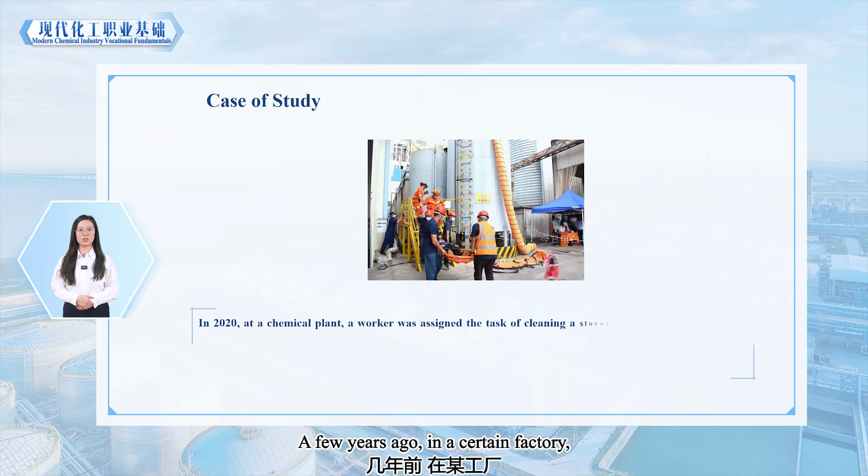Before we begin today's lecture, I would like to share with you a real accident case. A few years ago, in a certain factory, a worker was assigned the task of cleaning a storage tank. Unfortunately, shortly after entering the tank, the worker lost contact. Although rescue personnel arrived quickly and carried out emergency rescue efforts, regrettably, by the time the worker was rescued, vital signs had ceased. Why would a storage tank take a life? And how can such accidents be prevented?

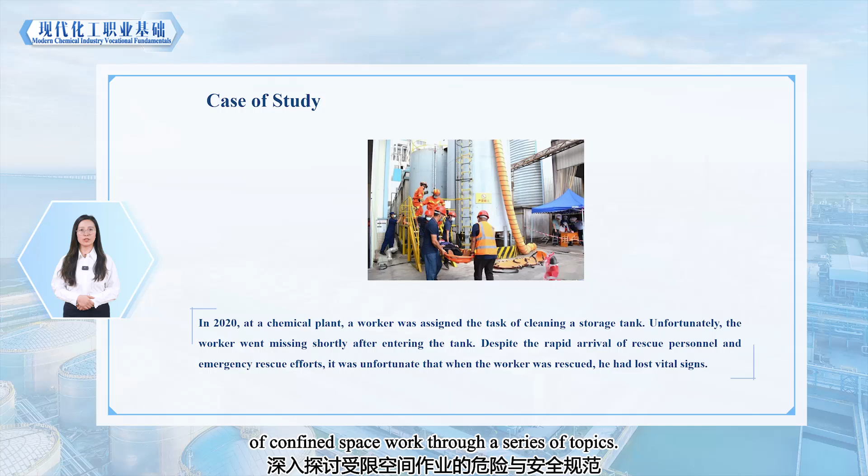Next, we will delve into the dangers and safety regulations of confined space work through a series of topics. First, let's understand the definition of a confined space.

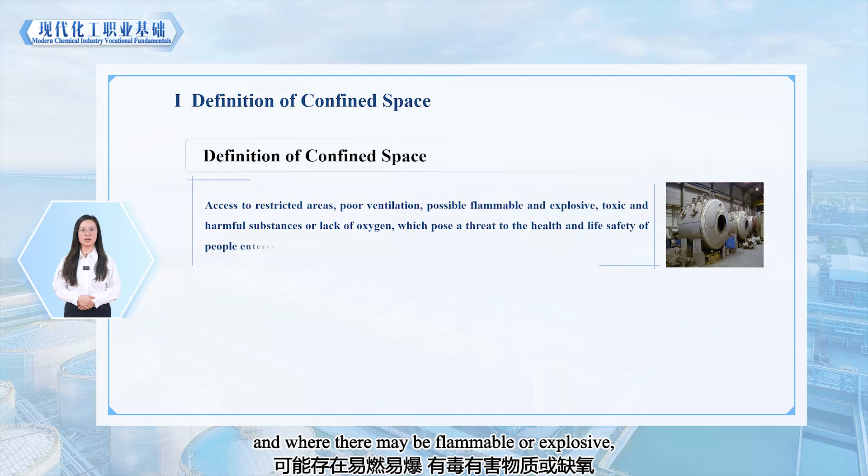A confined space refers to a facility or area that has restricted entry and poor ventilation, and where there may be flammable or explosive, toxic or hazardous substances, or oxygen deficiency, which poses a threat to the health and life safety of those entering, whether fully enclosed or semi-enclosed.

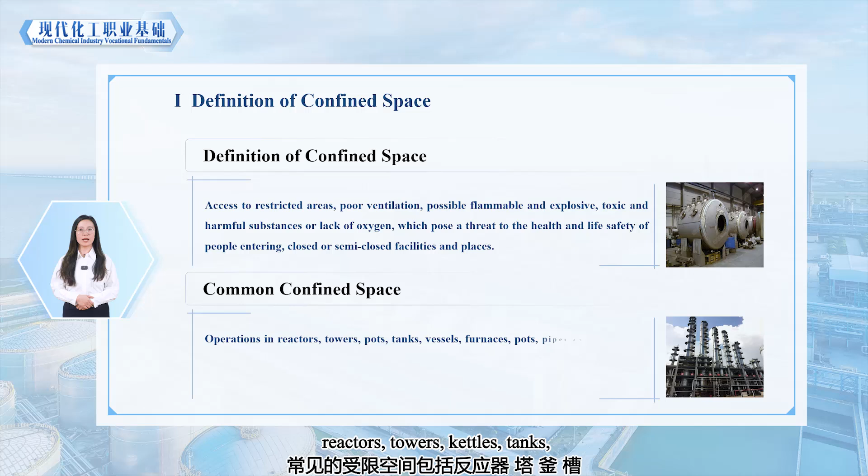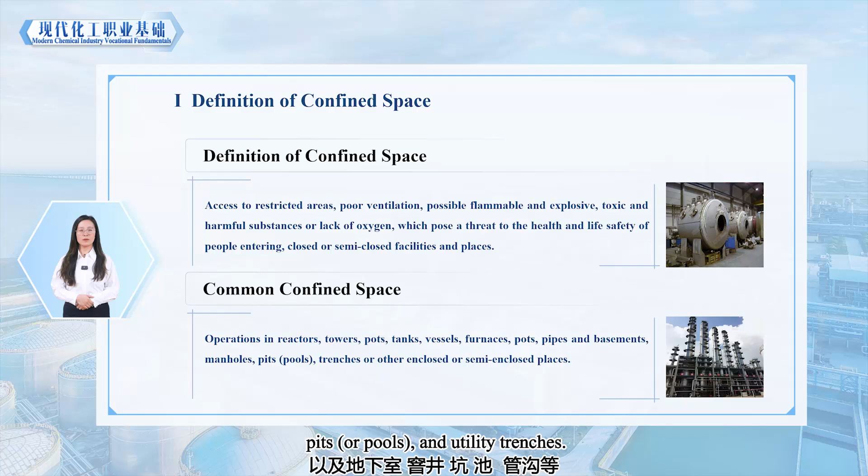Common confined spaces include reactors, towers, kettles, tanks, vessels, furnace chambers, boilers, drums, pipelines, as well as basements, manholes, pits or pools, and utility trenches.

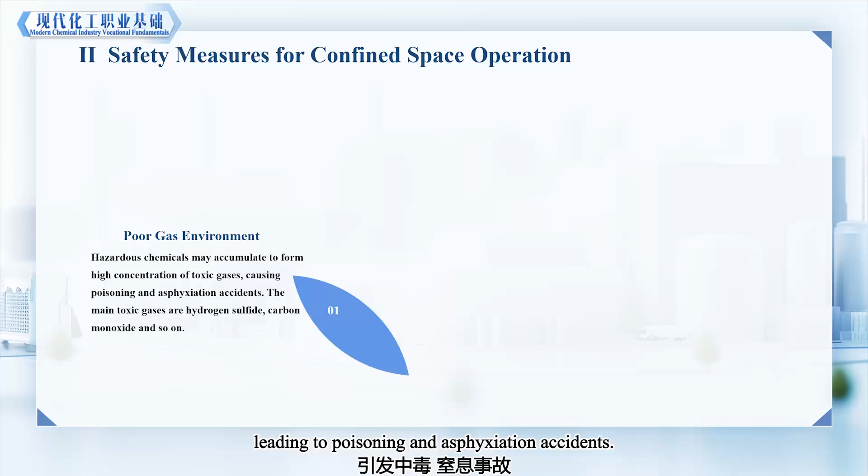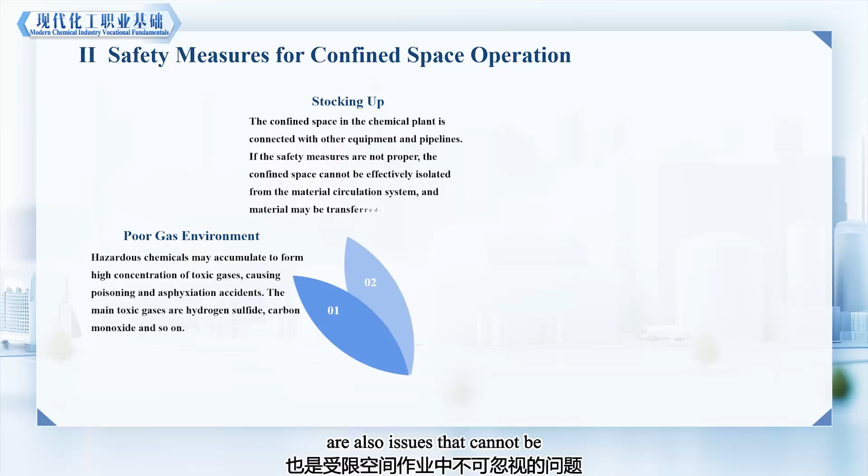Confined space work possesses multiple hazardous characteristics. Among these, poor gas environment is one of the main hazards. Hazardous chemicals may accumulate to form high concentrations of toxic gases, leading to poisoning and asphyxiation accidents. In addition, material stacking, difficulties in rescue, and other hazards are also issues that cannot be ignored in confined space work. In the case study mentioned earlier, the worker's death was caused by poisoning.

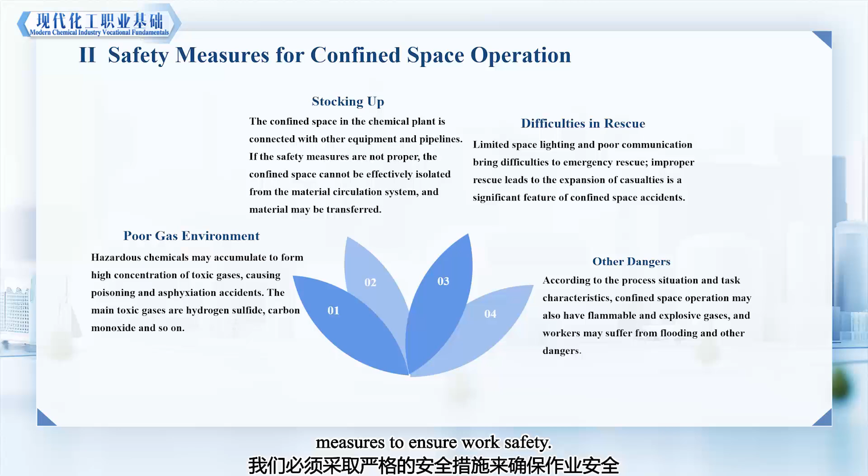Therefore, we must adopt strict safety measures to ensure work safety. Next, we will focus on the safety measures and requirements for confined space work. First, we must implement energy isolation. This is the first line of defense in confined space work.

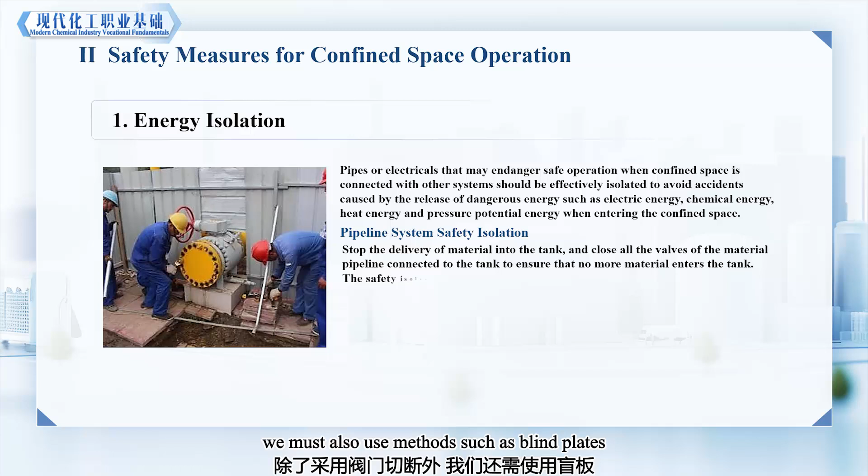We must ensure that any pipelines or electrical connections linking the confined space with other systems are effectively isolated to prevent the release of hazardous energy such as electrical, chemical, thermal, or pressure potential energy that could cause accidents. In addition to using valves to cut off flow, we must also use methods such as blind plates or removing pipelines and installing blind flanges to achieve safe isolation.

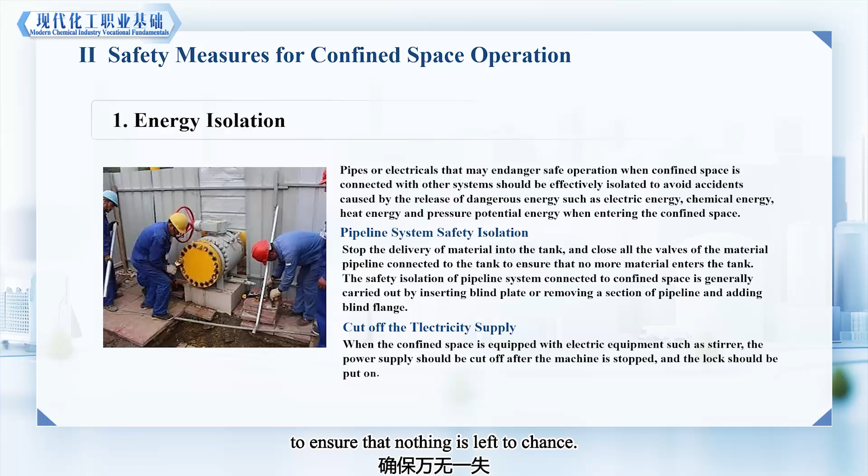Moreover, when the confined space contains electrically powered equipment, such as agitators, we should disconnect the power after shutdown and apply lockout and tagout to ensure that nothing is left to chance before commencing confined space work.

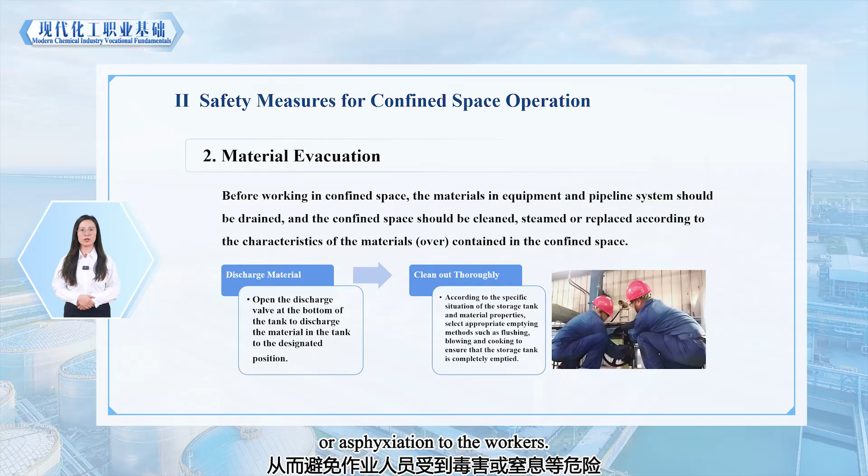We must evacuate all materials from equipment and pipeline systems, and according to the characteristics of the materials previously contained in the confined space, perform cleaning, boiling, or replacement of the confined space. This is to ensure that no harmful substances remain in the confined space, thus preventing poisoning or asphyxiation to the workers. The purpose of ventilation is to ensure air circulation within the confined space, which is one of the key safety measures in confined space work.

We should open manholes, hand holes, material access points, air vents, smoke vents, and other facilities that communicate with the atmosphere to allow natural ventilation. If necessary, forced ventilation may also be employed, but it must be noted that pure oxygen or oxygen-enriched air must not be introduced into the confined space to prevent the risk of explosion or other hazards due to excessively high oxygen concentrations.

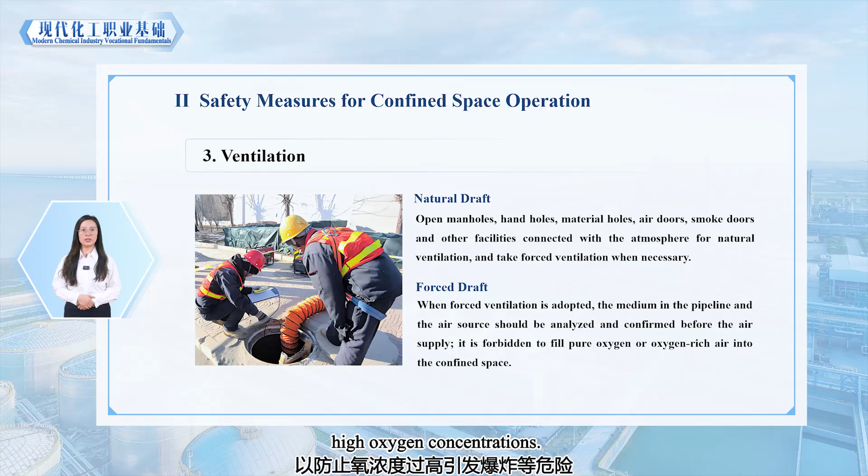Gas monitoring is a critical component of confined space work. Before work begins, we must conduct gas sampling and analysis within the confined space to ensure that the oxygen content, allowable concentrations of toxic substances, and concentrations of combustible gases meet safe requirements.

Specifically, the oxygen content should generally be between 19.5% to 21%, and in oxygen-enriched environments, it must not exceed 23.5%. The allowable concentration of toxic substances should meet relevant standards. When the lower explosive limit LEL of the measured gas or vapor is greater than or equal to 4%, its concentration should not exceed 0.5%. And when the LEL is less than 4%, its concentration should not exceed 0.2%.

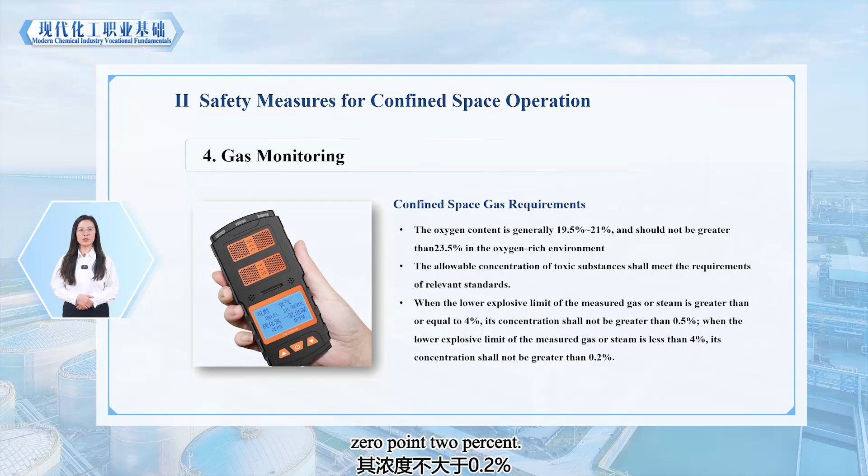During gas monitoring, the following points must also be adhered to. Sampling personnel must take adequate personal protective measures and conduct gas sampling and analysis within 30 minutes prior to work. Sampling points should be representative.

Especially in larger spaces, multiple sampling points are required. During work, personnel should carry portable gas detection and alarm devices to continuously monitor gas concentrations. If work is interrupted for more than 60 minutes, monitoring and analysis must be repeated to ensure that gas concentrations within the confined space remain within the safe range.

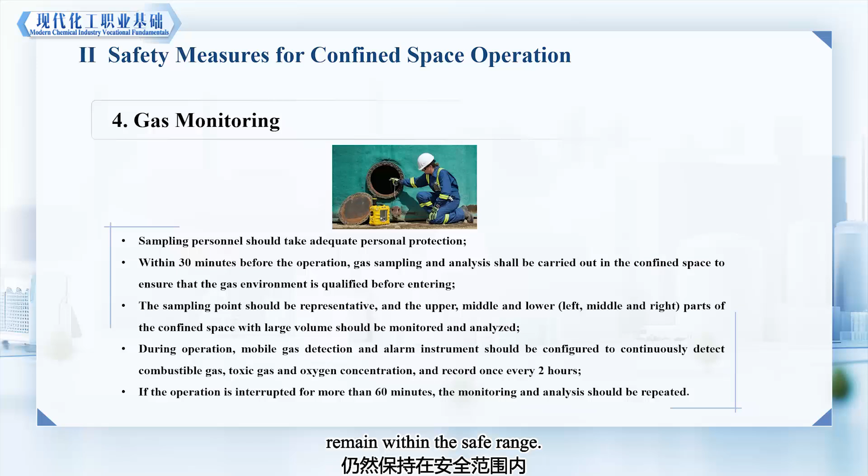In terms of personal protection, appropriate protective equipment should be selected based on the environmental conditions within the confined space. For example, in oxygen-deficient or toxic environments, wear self-contained breathing apparatus. In flammable or explosive environments, wear anti-static work clothing and work shoes, and use explosion-proof, low-voltage lighting and non-sparking tools. In corrosive environments, such as those with acids or alkalis, wear acid and alkali-resistant work clothing, work shoes, and gloves.

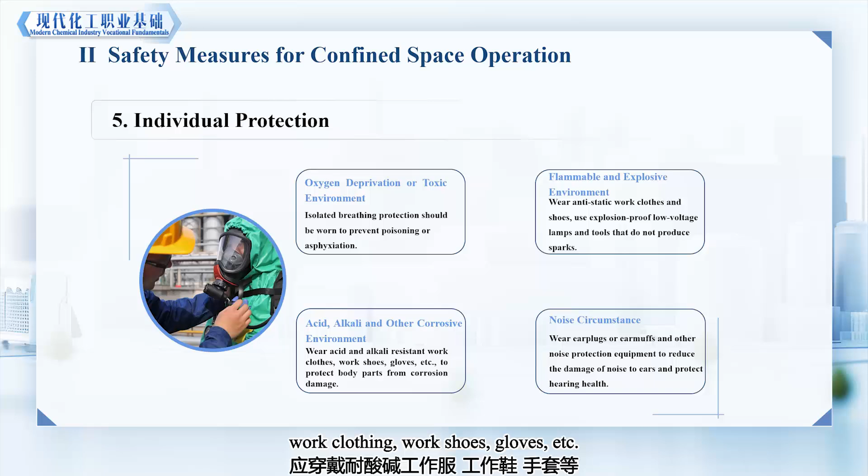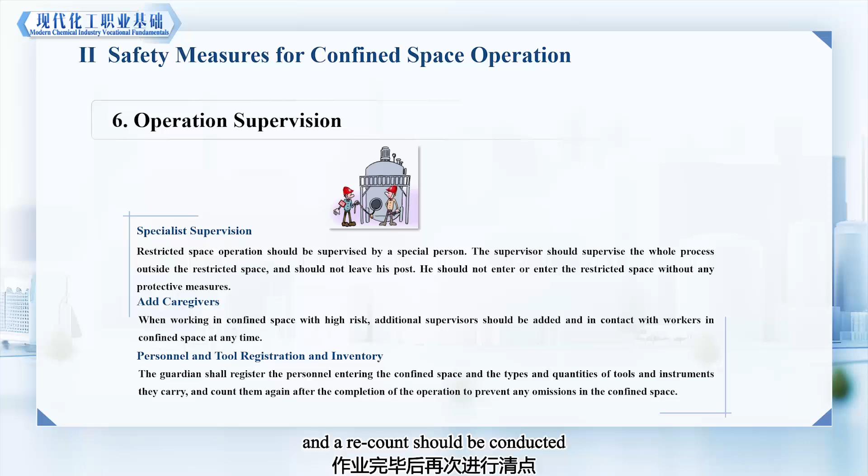Regarding work supervision, a dedicated supervisor must be assigned, and in high-risk confined space work, additional supervisors should be assigned. The supervisor should continuously monitor from outside the confined space and must not leave their post, to ensure the safety of the workers. At the same time, a record must be made of the personnel entering the confined space and the types and quantities of tools and equipment they carry, and a recount should be conducted after work is completed.

Prior to confined space work, a hazard analysis must be conducted, and a confined space safety work permit must be processed in accordance with the work permit procedure. Safety warning signs must also be installed, along with emergency equipment such as breathing apparatuses, rescue tripods, firefighting equipment, and first aid kits.

We have now understood the safety measures for confined space work, and next we will learn the general procedures for confined space work together.

Before work begins, a job hazard analysis (JHA) must be conducted, which is crucial as it helps us identify potential hazards during the work process. Then, in response to these hazards, carry out a series of safety preparations, including energy isolation, material evacuation, and gas monitoring, to ensure the safety of the work environment.

Once entering the work phase, we must possess a confined space safety work permit, which serves as a pass for the work. During the work process, a dedicated supervisor must be assigned to monitor and supervise the entire process. After work is completed, conduct a thorough check and organization to ensure the safety of the workers and that no safety hazards remain.

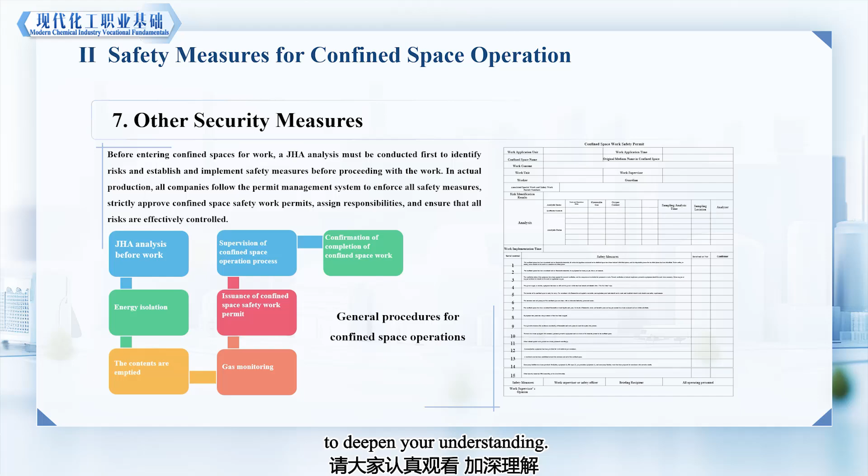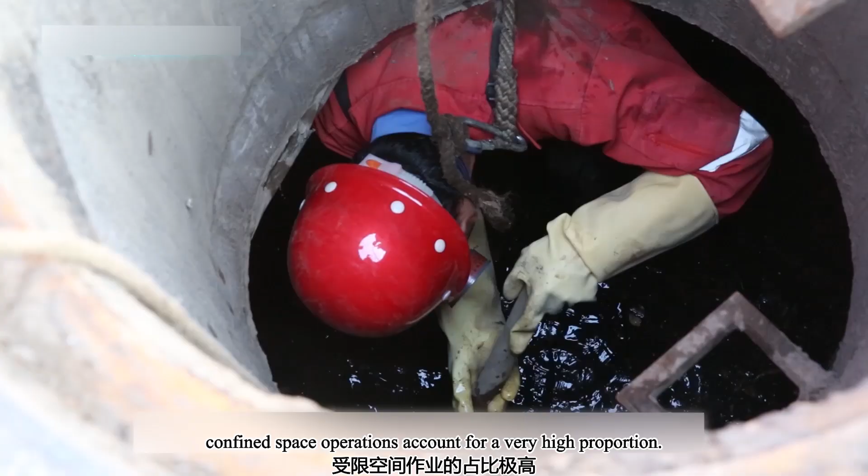In the maintenance of equipment in the refining and petrochemical industry, power industry, and urban underground infrastructure operations, confined space operations account for a very high proportion. A confined space refers to a closed or semi-closed place such as towers, tanks, pipelines, sinking pools, sewers, etc., where access is restricted and flammable, explosive, toxic, and harmful substances may exist or oxygen deficiency may occur.

In recent years, due to frequent casualties such as asphyxiation poisoning, fire explosions, falls from heights, electric shocks, and mechanical injuries in confined space operations, it has been revealed that enterprises with accidents have problems such as lack of management systems, unclear risk identification, weak safety awareness, insufficient skill training, and incomplete protective equipment for confined space operations.

In order to learn from accident lessons and prevent potential hazards, we take the cleaning operation of the process water storage tank in the confined space practical operation base as an example, to demonstrate the standard confined space operation process and related safety precautions. First, before the operation, the Confined Space Operation Application Unit must carry out JSA, Job Safety Analysis, with the construction unit for the operation content, implement safety measures at the operation site, and jointly complete the JSA record form.

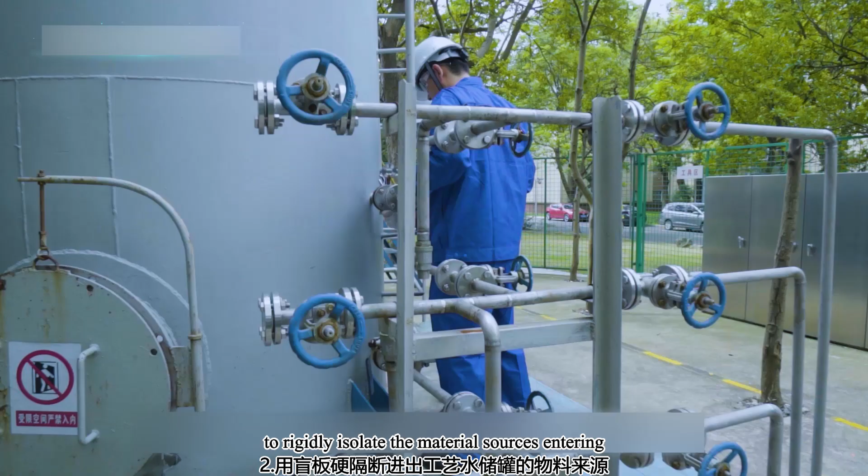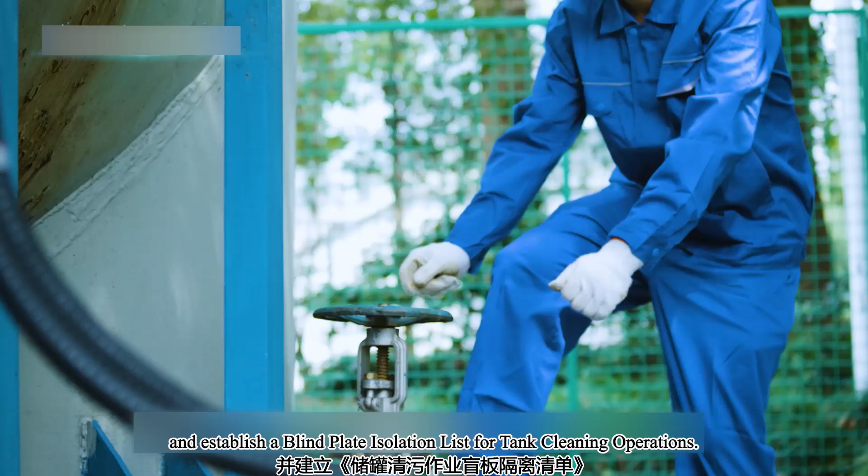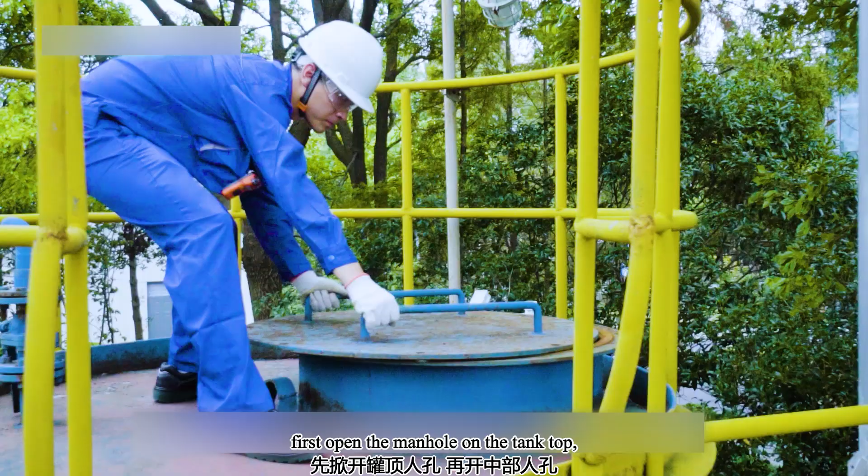Second, use blind plates to rigidly isolate the material sources entering and exiting the process water storage tank, and establish a blind plate isolation list for tank cleaning operations. Third, fully open the bottom drain valve of the storage tank to drain all process water materials in the storage tank. Fourth, open the manholes strictly in sequence: first the manhole on the tank top, then the middle manhole, and finally the lower manhole.

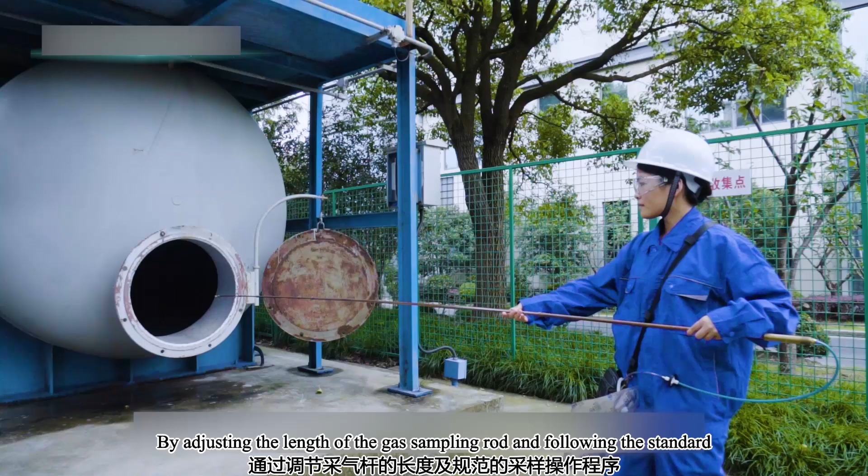Fifth, after 8 hours of natural ventilation, use a professional gas sampler to sample the storage tank. Before sampling, confirm that the airtightness of the sampler and its auxiliary devices is intact by adjusting the length of the gas sampling rod and following the standard sampling operation procedures.

Ensure that the gas inside the storage tank is collected, then sequentially sample the upper, middle, and lower parts of the storage tank. Sixth, send the collected gas samples to the analysis laboratory for gas chromatograph analysis, and record the results of oxygen content, hydrogen sulfide content, and total hydrocarbon content.

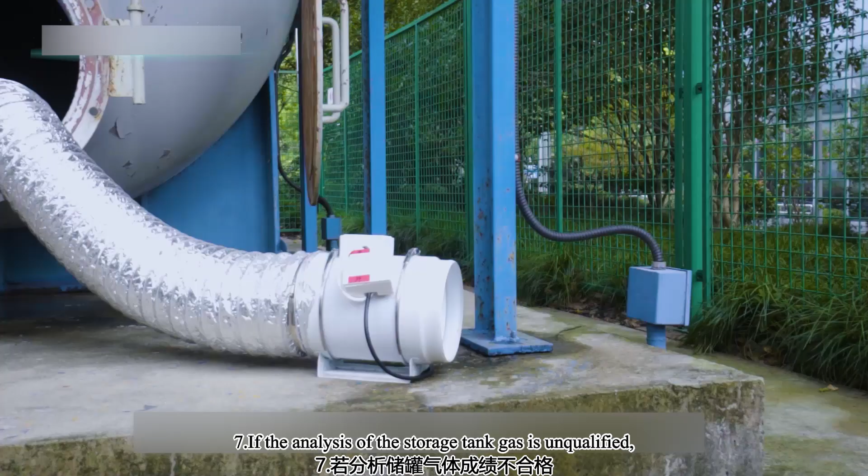Seventh, if the analysis of the storage tank gas is unqualified, blow air into the lower manhole of the storage tank. Reduce the concentration of harmful gases through forced ventilation, and make the oxygen content qualified. After 2 hours of forced ventilation, carry out gas sampling and analysis again according to the above procedures.

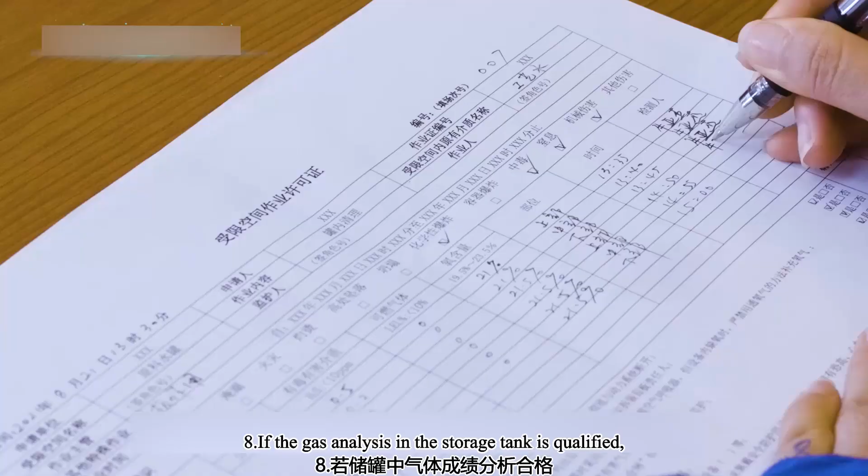Eighth, if the gas analysis in the storage tank is qualified, issue a confined space work permit according to the system. The confined space work permit is jointly signed by the applicant, operator, supervisor, gas detection personnel, safety management personnel, etc.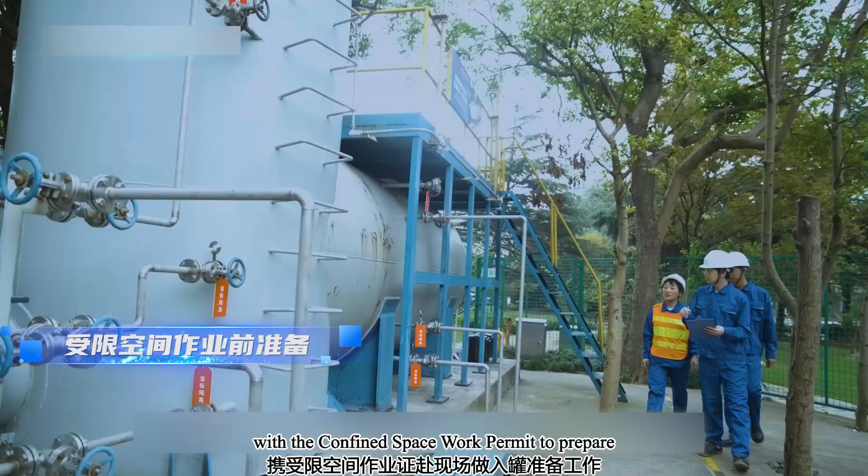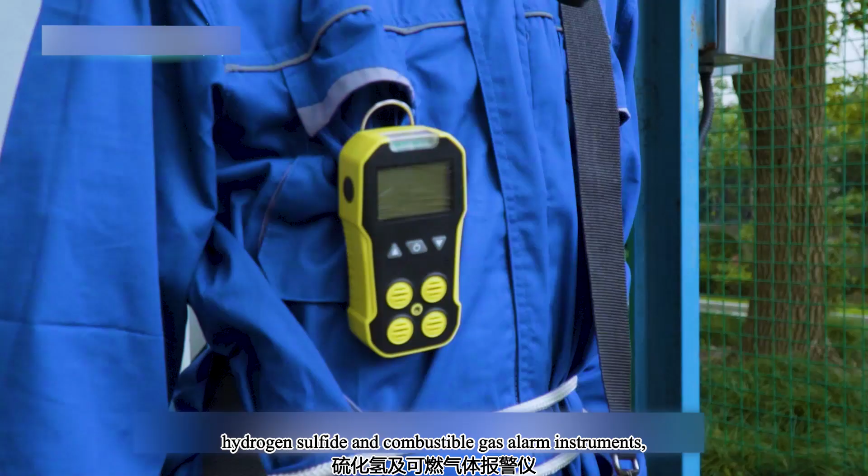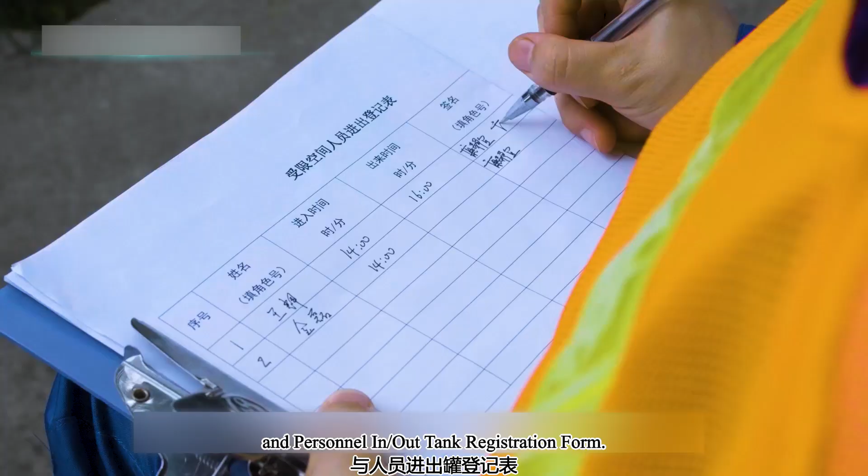Ninth, operators, supervisors, and safety management personnel go to the site with the confined space work permit to prepare for entering the tank. Operators must wear safety helmets, work gloves, filter respirators, tool kits, low-voltage explosion-proof lighting equipment, explosion-proof walkie-talkies, hydrogen sulfide and combustible gas alarm instruments, fasten a life safety rope around the waist, and fill in the tool in or out tank record list and personnel in or out tank registration form.

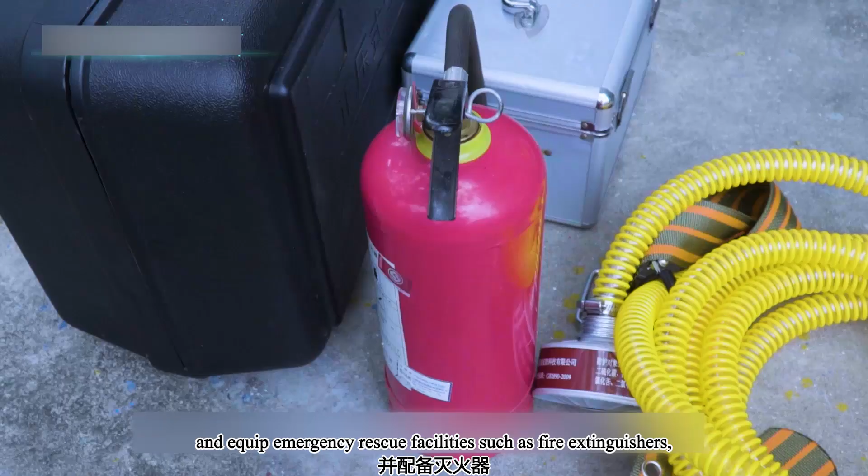10th, before operators enter the storage tank for operation, set up warning fences or warning tapes at the operation site, and equip emergency rescue facilities such as fire extinguishers, positive pressure air respirators, and first aid kits.

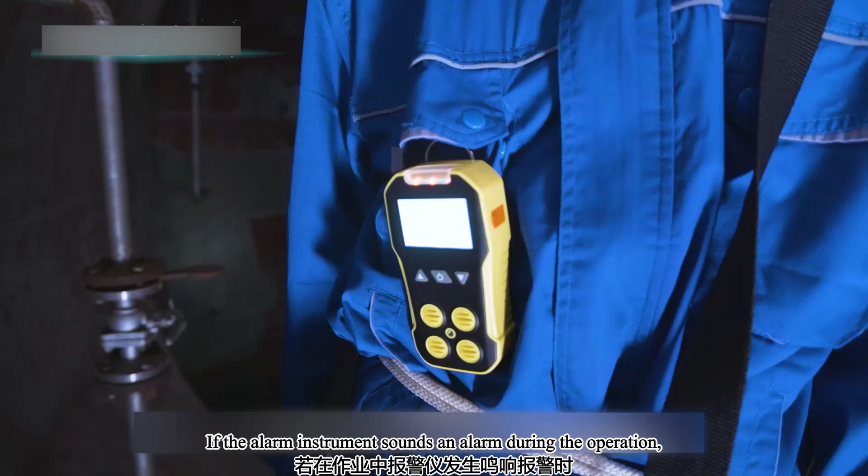11th, when operators enter the storage tank for operation, they should always pay attention to the hydrogen sulfide and combustible gas alarm instruments. If the alarm instrument sounds during the operation, the operator must immediately terminate the operation and exit the storage tank.

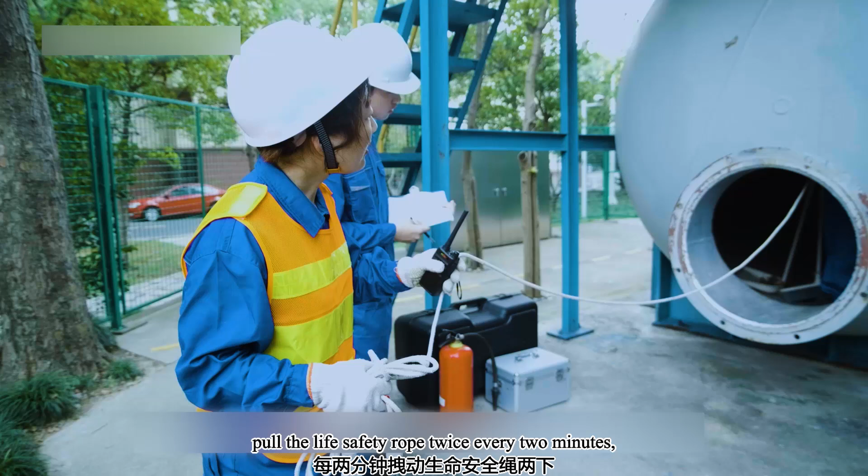12th, during the operation of the operator in the storage tank, the supervisor outside the tank is strictly prohibited from leaving the supervision site. The supervisor must communicate with the operator every 2 minutes through an explosion-proof walkie-talkie, and pull the life safety rope twice every 2 minutes. The operator must also respond to the pull of the life safety rope. Through these interactions, ensure the safety of the operator and gain rescue time.

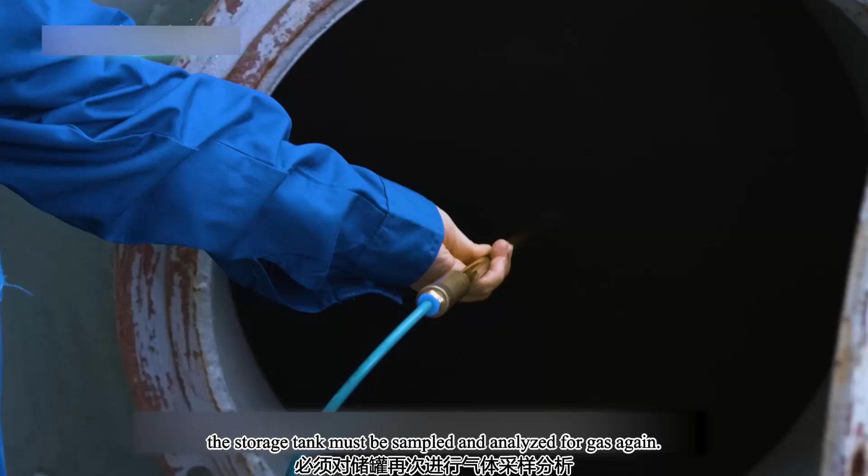13th, within 2 hours of the operation, the storage tank must be sampled and analyzed for gas again. If the result is unqualified, the operation must be terminated immediately.

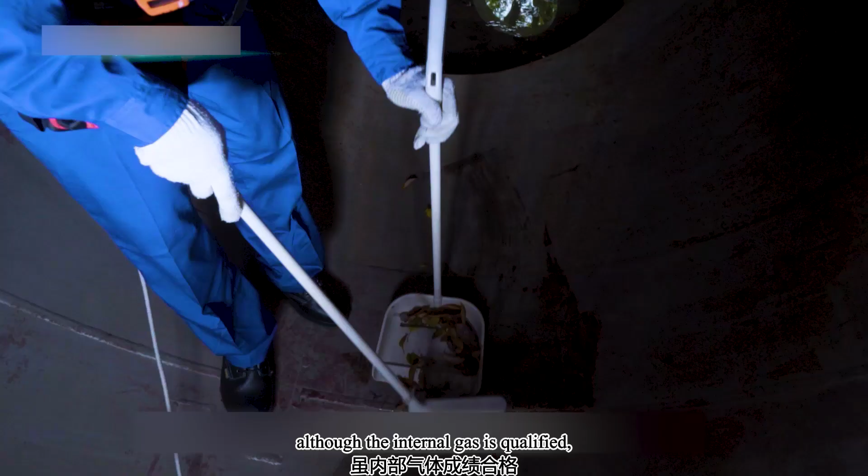14th, during the cleaning operation of the storage tank, although the internal gas is qualified, when there is a strong odor or irritating smell, the operator must switch to a long tube respirator, that is, the operator breathes fresh air outside the tank.

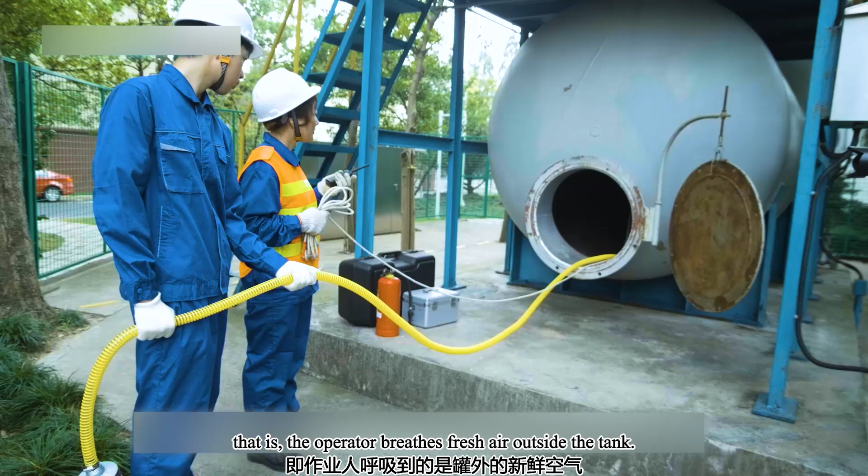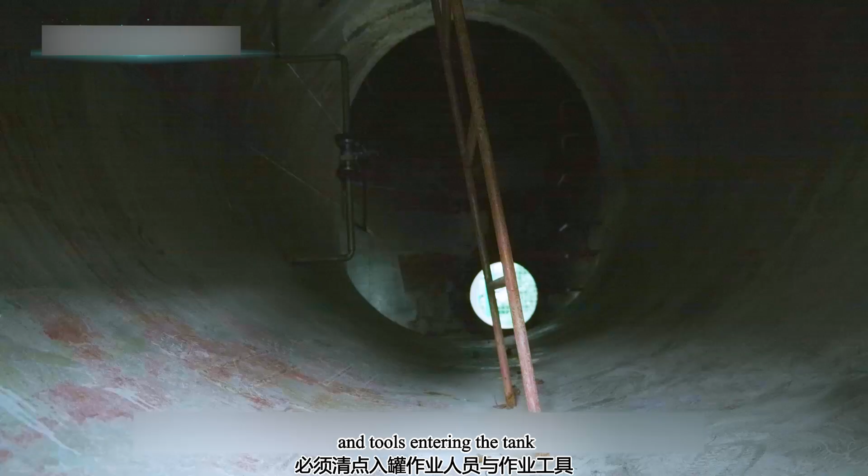15th, at the end of the confined space operation for tank cleaning, it is necessary to count the operators and tools entering the tank to ensure there are no personnel or tools left in the tank, and then close the manhole with a tank manhole lock and hang a no entry warning sign.

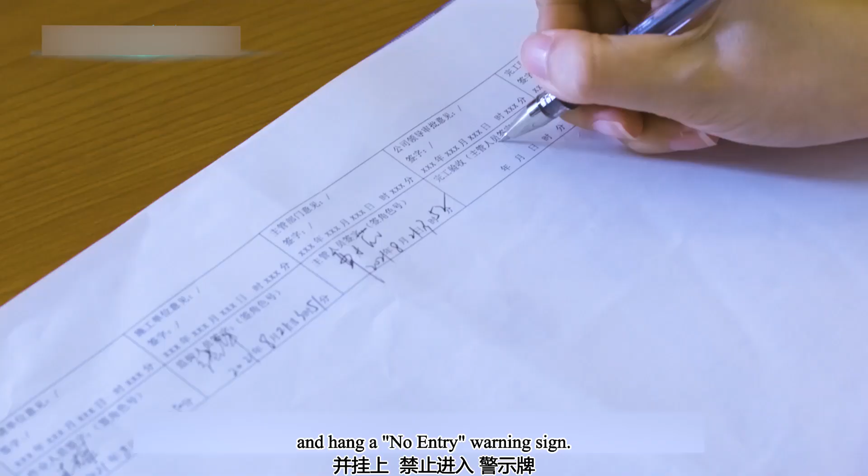16th, finally, the safety supervisor signs and confirms in the completion column of the confined space work permit. 17th, enterprises with conditions should implement video monitoring for the entire confined space operation.

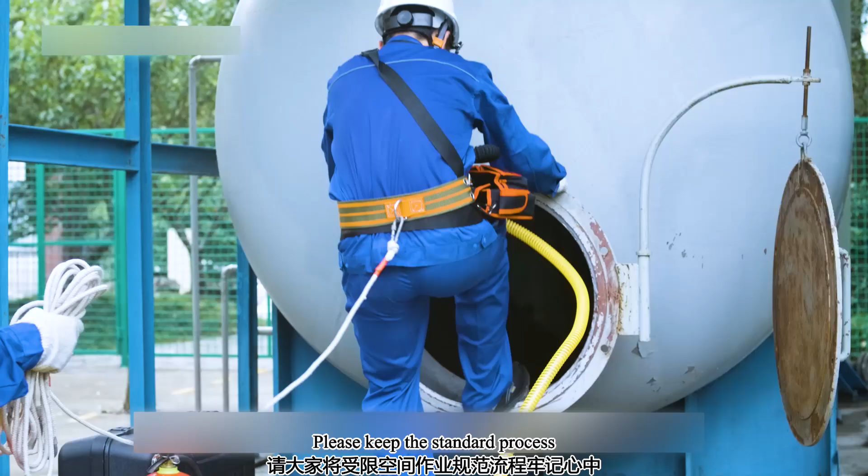Through the video demonstration, we have understood the definition, risk identification, work process, safety measures, and responsibilities of relevant personnel for confined space operations. Please keep the standard process of confined space operations in mind and skillfully apply it in practical work. I wish you all a smooth and safe completion of all confined space operations.

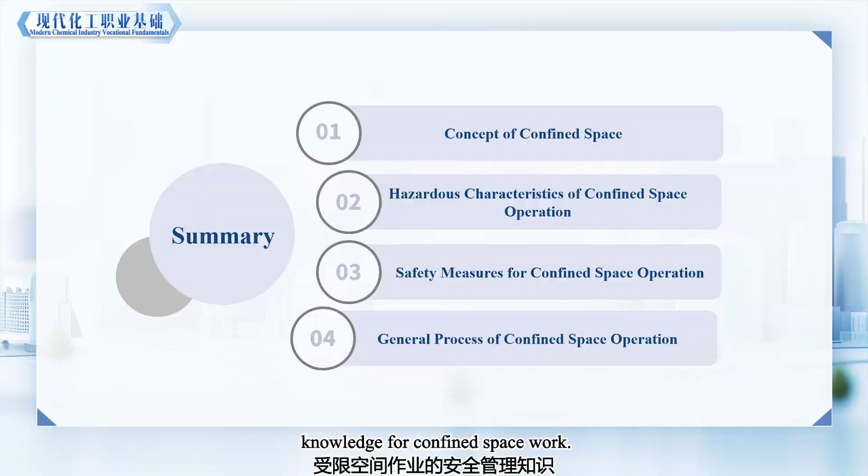Through this lesson, we have gained a comprehensive understanding of the safety management knowledge for confined space work. I hope that everyone can apply the knowledge learned to practical work to ensure that each instance of confined space work is carried out safely and efficiently.